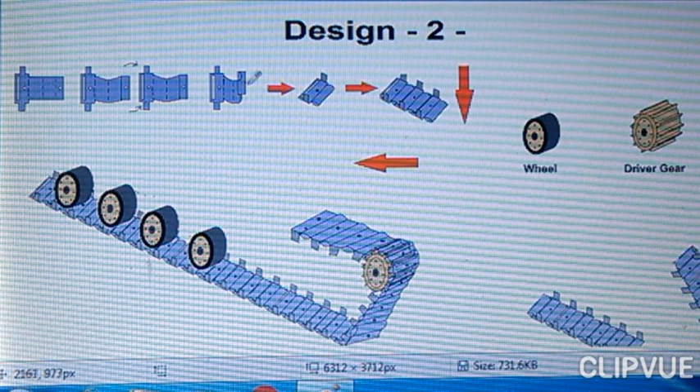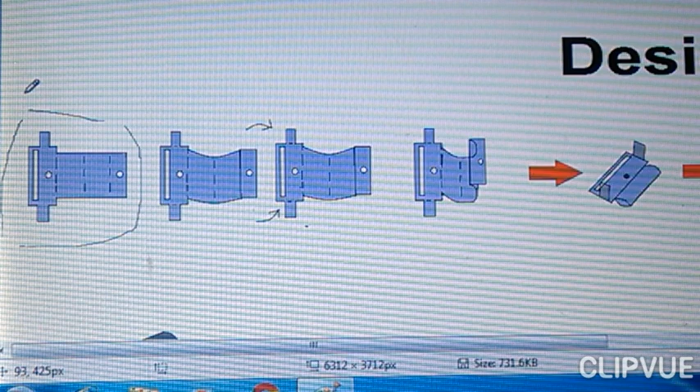Actually, I've made these drawings to show you my second design of homemade tracks for your RC tank or RC robot or RC rover project. Here is a piece of a metallic plate with thickness of 1 millimeter or higher, such as 2 or 3 millimeter, but that would be more difficult to deal with. Anyway, 1 millimeter plate of tin plate or another source.

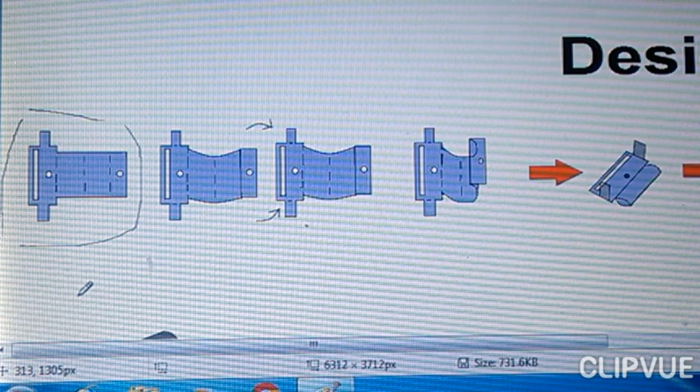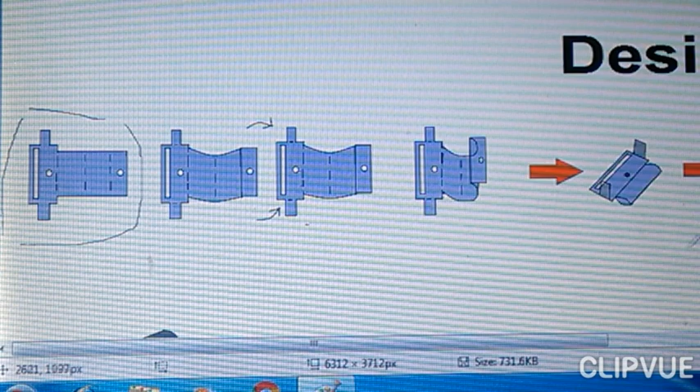You have to cut it to make this shape. The dimensions belong to you, as they depend on the size of your RC rover project. You will see these two notches, this one and this one. They would form a guide for the wheels of your robot or tank. This one and the opposite one. Okay.

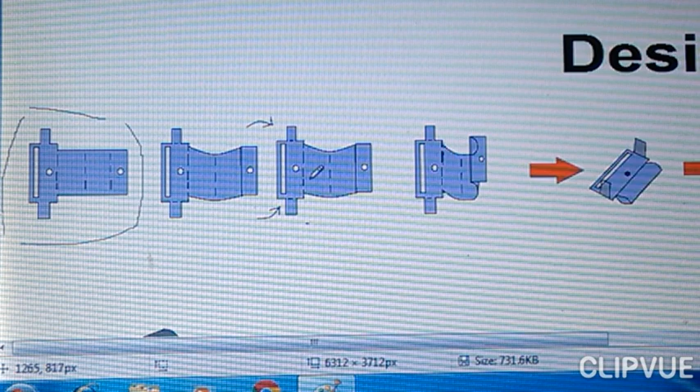The piece of plate would have a hole, this longitudinal hole. You make it by striking this area with a sharp tool like a punch or a sharp screwdriver to form a rectangular hole. This hole would contain the ring plate to engage with the other plate.

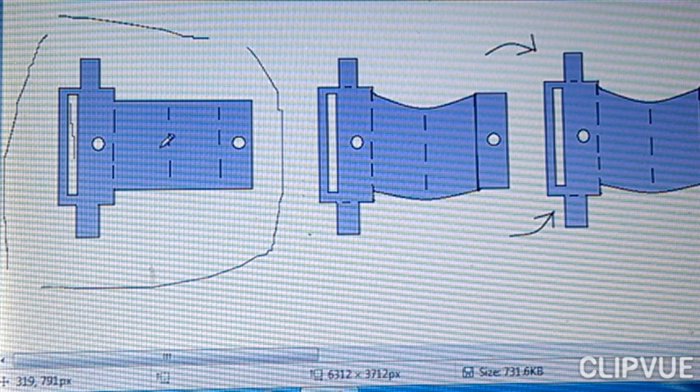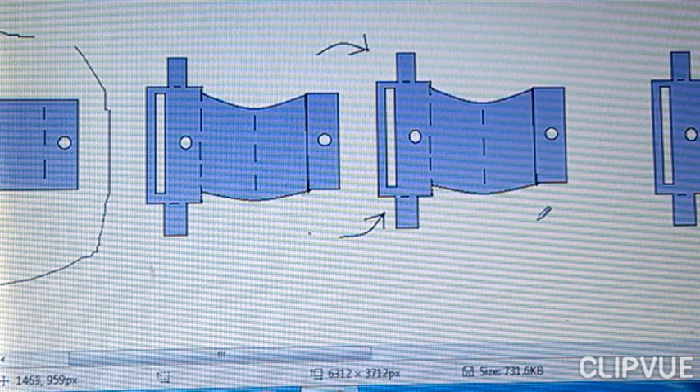This area, which is about 1 centimeter wide, and this area's width would be about 3 centimeter. As I have mentioned before, the dimensions belong to you and your design. The 3 centimeter wide area, this one, would be folded like this by pliers or another tool to form this shape.

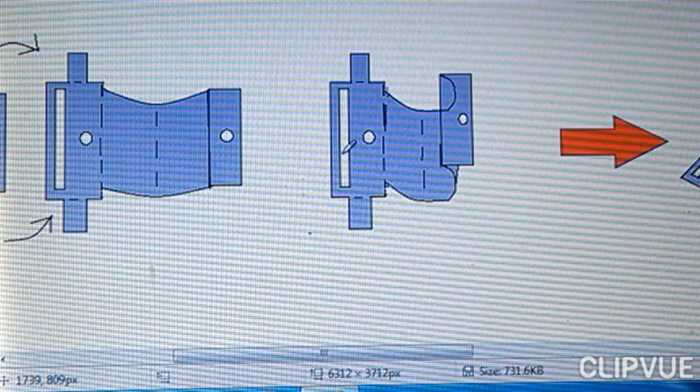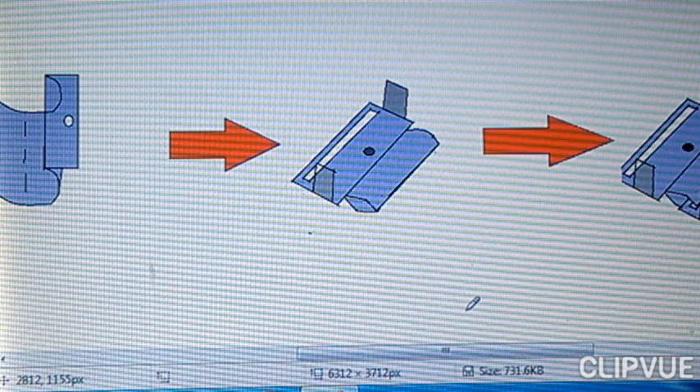You need to put a bolt or a rivet in these 2 holes just to close it and fix it to form this piece of the track. And finally, you would have this chain of a metallic track. After that, you would bend the 2 notches, this one and this one, in a right angle. The notches have two functions.

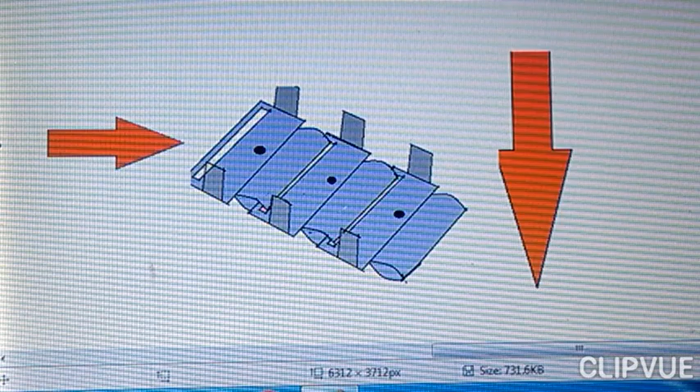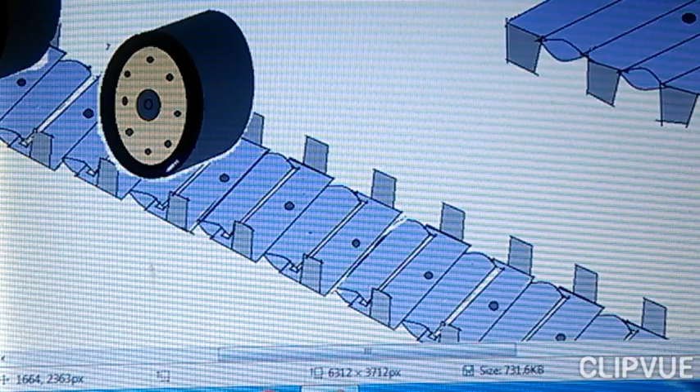The first one, as we see here, the first one is to make a guide for the wheel, as you see here, and the second is to form teeth to drive the track by the driver gear. The driver gear, as we see here, this one, is a conventional spur gear.

The distance between each two teeth is the same as the distance between the track teeth or the track notches. You can get this by using mathematics, by measuring the circumference of the gear and dividing it by the number of the teeth.

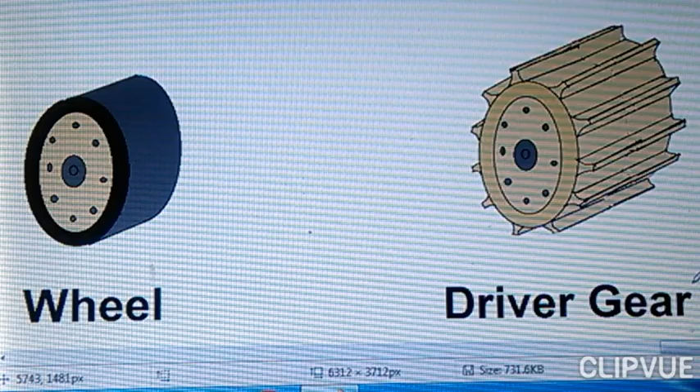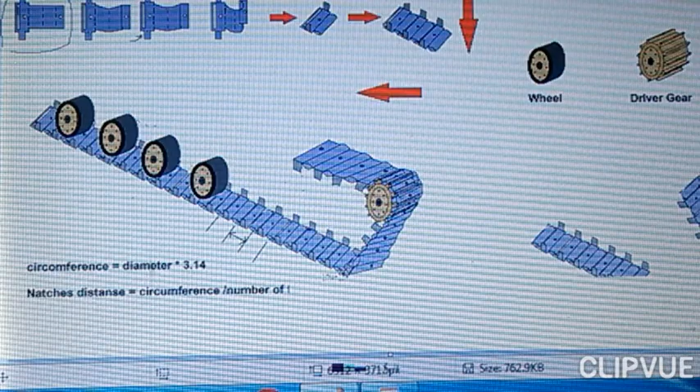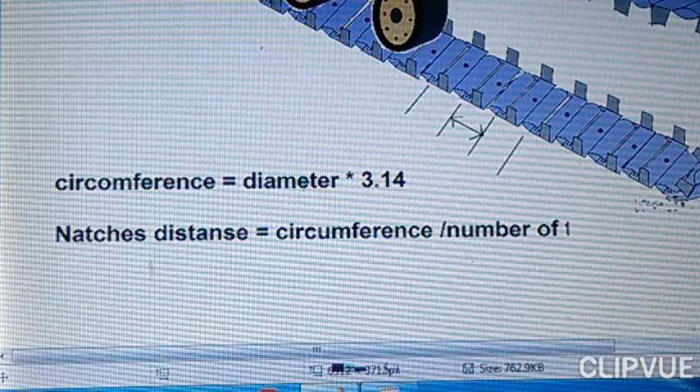Then you can calculate the distances between each two adjacent plates of track by calculating the circumference of the driver gear. This one. The circumference of the driver gear.

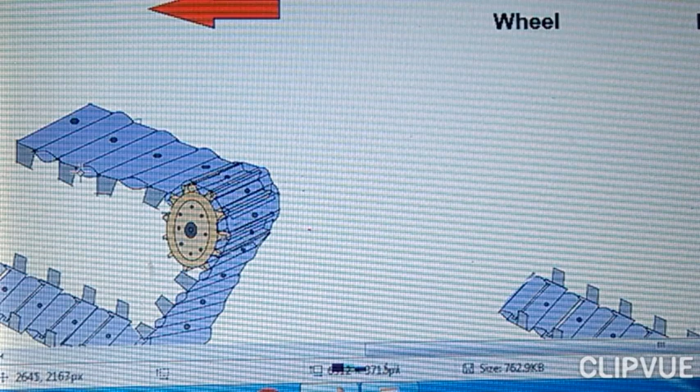Firstly, before you design the track, you have to choose your driver gear with the number of teeth. Then you can take the data of the gear, the number of teeth and the diameter and the circumference, to calculate the distances between each two adjacent notches of the track and the number of the notches, like this.

Let's use the calculator. If the diameter of the driver gear is 5 centimeter, times 3.14, the circumference of the gear would be 15.7 centimeter. If you have 8 teeth in your driver gear, then you should divide the circumference by the number of the teeth, which is 8.

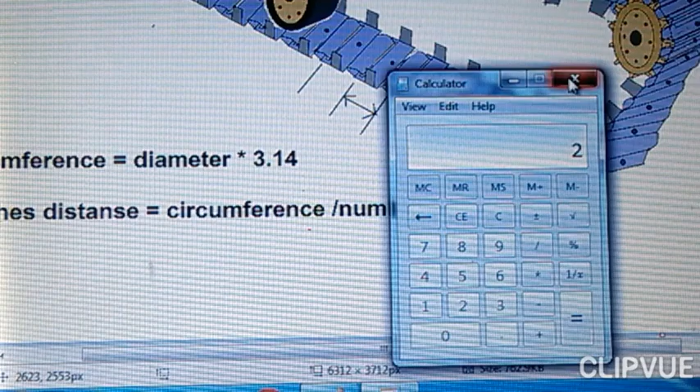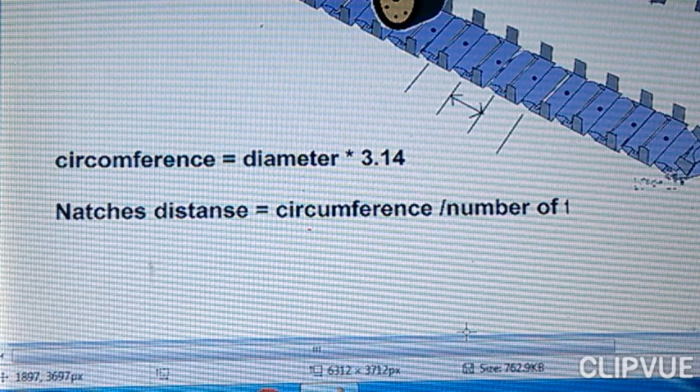You will get the distance between each two adjacent notches, which in this case would be 1.962 centimeter. That's equal to 2 centimeter. These are the mathematics or the laws you can use. Finally, you will have this beautiful design for your RC tank or RC rover or RC robot track.